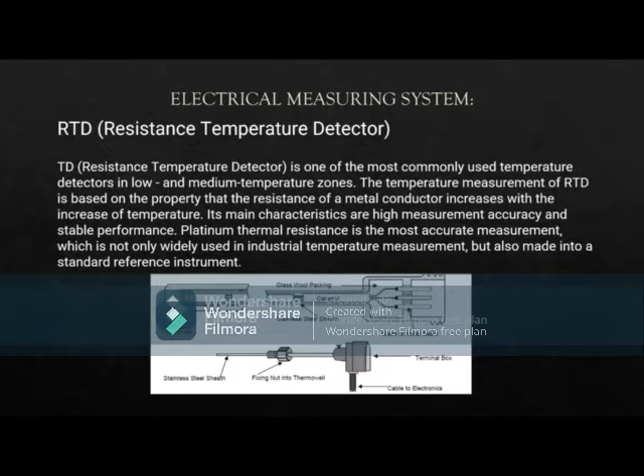In today's video, we are going to talk about a device that is used commonly in industrial applications for collecting temperature data. I am not talking about a thermistor or thermocouple. I am talking about a resistance temperature detector, or sometimes commonly referred to as an RTD.

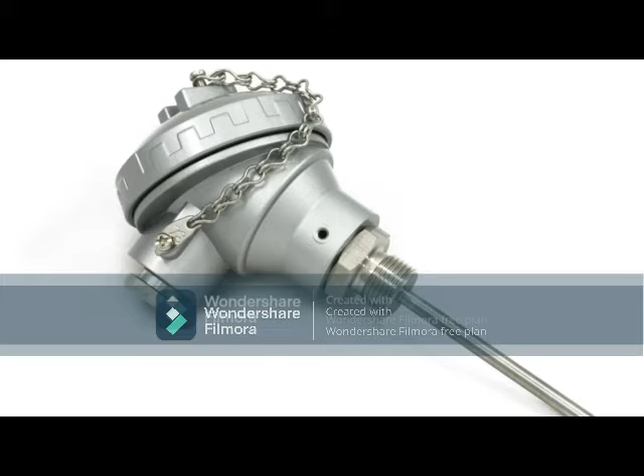An RTD is a type of input signal commonly found in industrial monitoring situations. The same types of situations where you might find basic digital and analog signals coming into a PLC. Much like those digital and analog signals, depending on the PLC hardware that is being used, you can also input RTD signals into the PLC accurately to read temperature data in many different applications.

In this video, we will talk about what hardware makes up the RTD and how it works. We will also discuss some of the reasons RTDs are used instead of other temperature devices such as thermocouples or thermistors. At its core, RTDs use a specific type of metal that, depending on the resistance measured in that metal, can determine the temperature. The actual measurement occurs at the element, which is a portion of the device that actually is able to collect the data needed to provide accurate temperature readings.

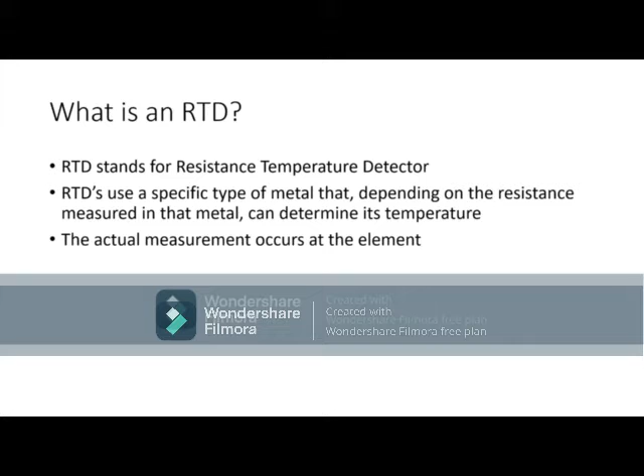There are many different types of RTDs, some more common than others. A few examples are: first, the thin film element, which uses a very thin layer of resistive metals adhered to a substrate, typically ceramic, then coated in glass or epoxy. Next is the wire wound element. This type of element can provide greater accuracy and wider temperature measurement ranges, however, can create stress on the element wire, which can lead to slight measurement errors over time.

Lastly is the coiled element, quickly becoming the most common type of RTD element. The coil element combines ideas from the two previous types as well as additional design elements. This element allows for strain-free measurement on the element wire while still providing very accurate measurements.

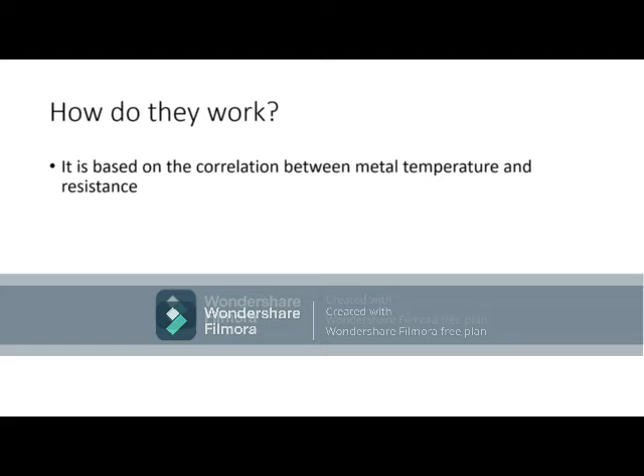So how do these different RTD elements actually work? RTDs work off a very basic principle, which is the correlation between metal temperature and resistance. As the temperature of the metal increases, the metal's resistance to allow flow of electricity increases. So it stands to reason that as the temperature of the RTD resistive element increases, the electrical resistance measured in ohms also increases. Understanding this resistance and its relationship with heat is what can give us an accurate temperature reading.

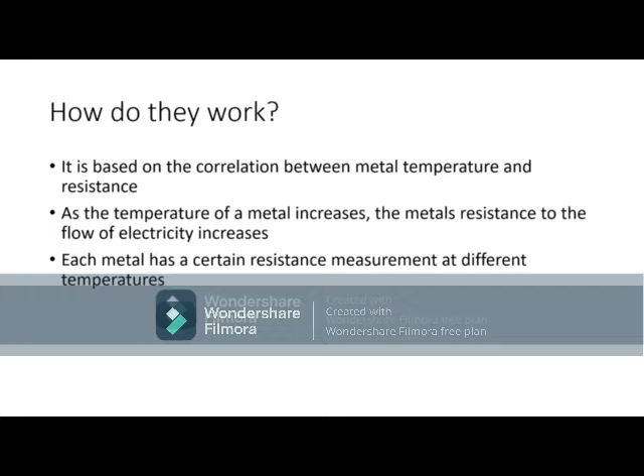Each metal has a certain resistance measurement at different temperatures. So based off the resistance that is measured in a given type of metal, we can determine what the temperature actually is. The most common types of metals used in RTDs are platinum, nickel, or copper.

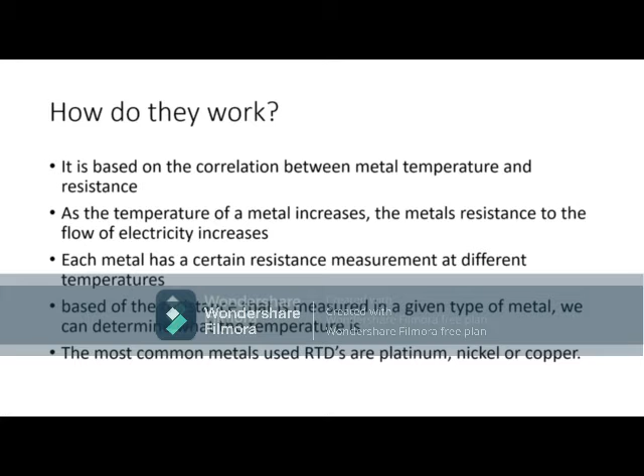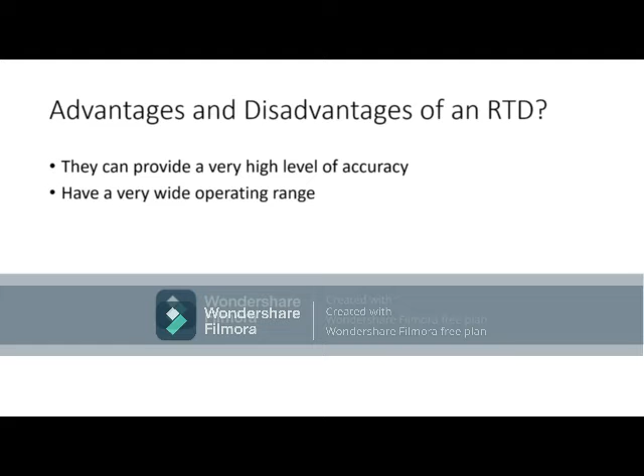So what are some of the advantages of using RTDs as opposed to other types of temperature measurement devices? First and foremost is the high level of accuracy they can provide. They also provide a very wide operating range, which can make them a great option in many different applications. Also, because of their high accuracy level, they are often used in situations where temperature measurement is critical.

A few disadvantages include the fact that RTDs are rarely used at temperatures above 660 degrees Celsius. Above this temperature, it can become difficult to prevent the metal from becoming contaminated by the metal sheath surrounding the RTD element.

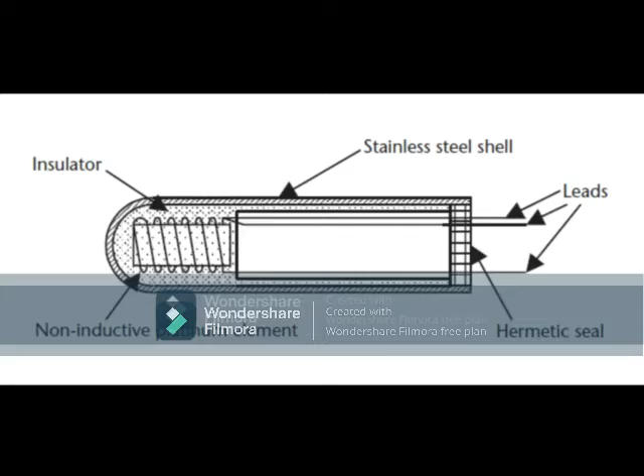Also, at lower temperatures, RTDs do not provide the same level of accuracy or resolution as thermistors, which is another type of temperature measurement device. As you can see, for the most part, RTDs offer a great option for many different temperature measurement scenarios. Because of their reliability, high level of accuracy, and ability to measure a very wide range of temperatures, they are one of the most widely used temperature measurement devices today.

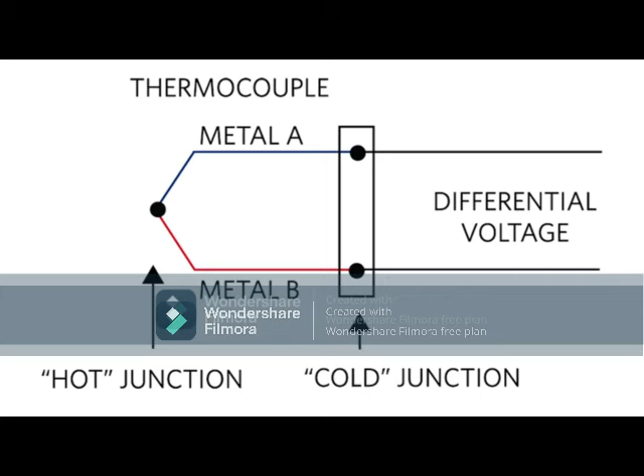So what makes up a thermocouple? Simply put, a thermocouple consists of two dissimilar metals. These two different metals are welded together at one end, creating a junction between them. It is at this point where the temperature can actually be measured. To protect the two different metal conductors, it is common to see this measurement end of the thermocouple housed in some sort of protective sheathing, commonly stainless steel, but other materials can be used as well.

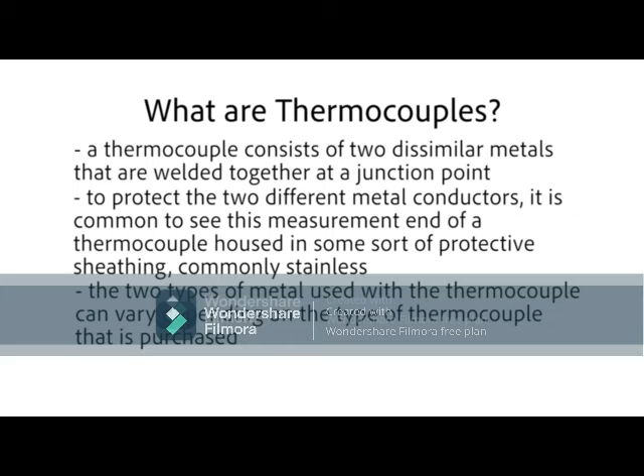The two types of metal used with the thermocouple can vary depending on the type of thermocouple that is purchased. Type K thermocouples are one of the most common, and they use a combination of nickel chromium and nickel aluminum. But again, depending on the type of thermocouple, those combinations can vary greatly.

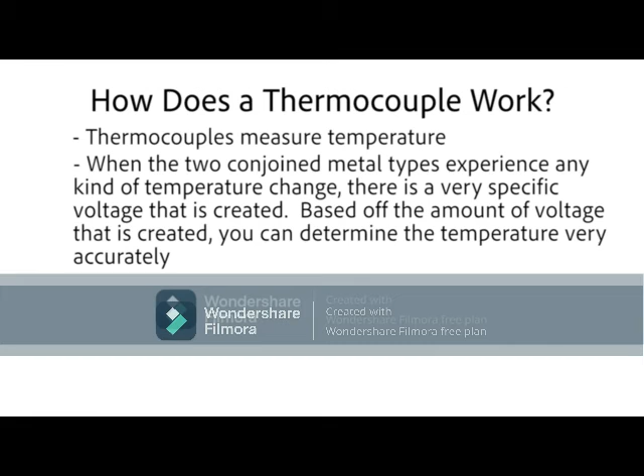So how does the thermocouple actually work? Well, it's really quite simple, which is one of the reasons it can be such a reliable method for measuring temperature. When the two conjoined metal types experience any kind of temperature change, there is a very specific voltage that is created. Based off of the amount of voltage that is created, you can determine the temperature very accurately. Thermocouple voltage reference tables can be used to find out the temperature ranges based off of the type of thermocouple being used and the voltage that is being created.

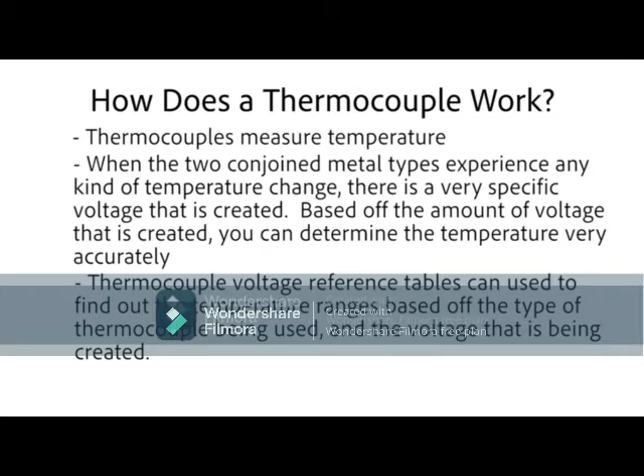So why would you use a thermocouple as opposed to an RTD or other temperature measuring devices? There are a few main factors that make thermocouples very good options in certain situations. First and foremost is cost. The average thermocouple can cost about 2 to 3 times less than the average RTD. So that alone makes them a better option for many people.

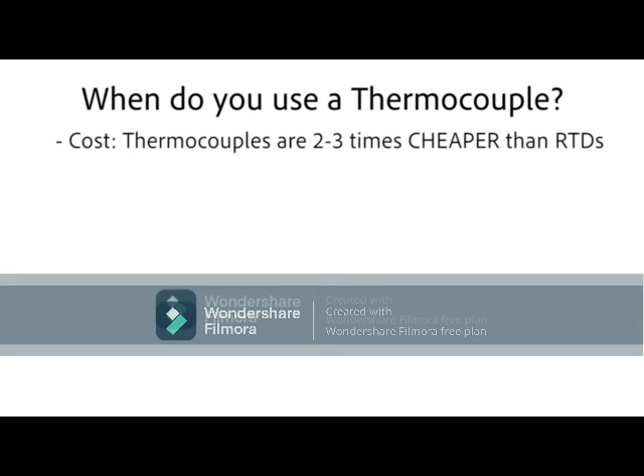Also, depending on the type of thermocouple that is being used, they can have a higher temperature measurement range than RTDs. For example, noble metal thermocouples can measure temperatures as high as 3,100 degrees Fahrenheit. Another strong reason why you might use thermocouples is the fact that in general, they are considered more durable overall than RTDs or other measurement devices.

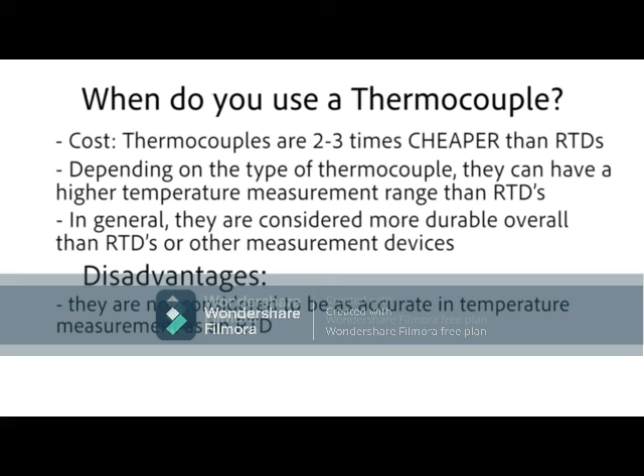With all the advantages they can offer, there are a few disadvantages. First, they are not considered to be as accurate in temperature measurements as RTDs. Also, in many lower temperature scenarios, RTDs can provide better resolution, giving the user a more accurate measurement. As you can see, there are many different applications where using a thermocouple is a great option. With their relatively low cost and high level of reliability, they make a great option wherever temperature measurements are important.